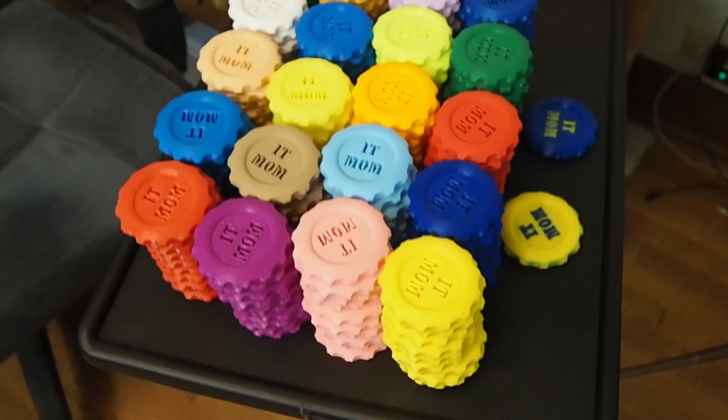So I did a live stream a little while ago and made a little announcement that I was going to take a break because I had some messes to clean up, and I had a bit of printing to do in preparation for MRRF 2018. That's right, I'm going to MRRF, and I've got 202 Maker Coins ready for it. Now let's talk about these real quick.

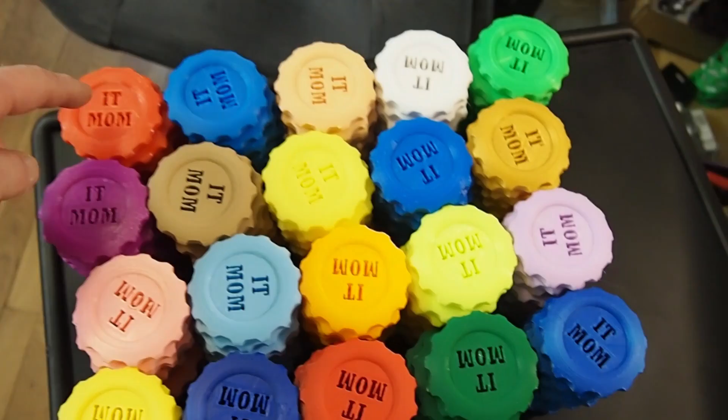Alright, so what do we got here? Well, we got a bunch of different brands, so let me just see if I can remember them all. Alright, so this is MG Chemicals Red PETG.

Very nice. This is the blue MG Chemicals PETG. This is light skin MG Chemicals. The whites are a combination of MG Chemicals and Zyltech. This is neon green from MG Chemicals. This is the gold roll of filament from Monoprice that came with my Mini.

This is MG Chemicals blue PLA. These are all PLA so far. This is MG Chemicals yellow, MG Chemicals wood, MG Chemicals purple, then MG Chemicals pink. Then this light blue, orange, fluorescent green, and purple are all Zyltech.

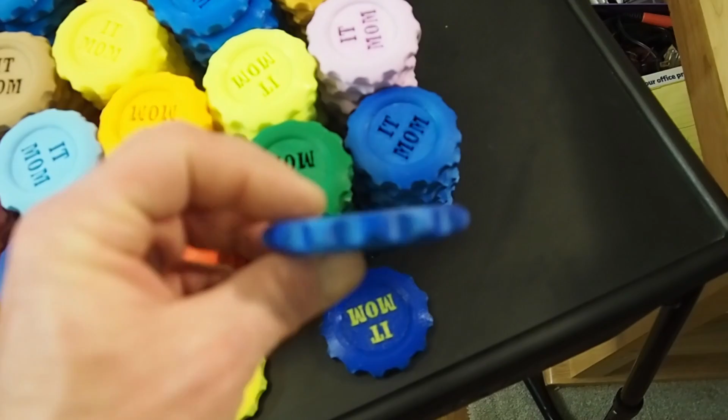And now let's come to the front of the line. These guys are important, and the reason is, oh, stay tuned. But this is Proto Pasta's High Five 3D printing nerd stuff. These two right here are Matter Hackers Pro PLA. And these two here are Tesla filament.

So these guys are actually something special. Little project I've got going on behind the scenes with my Delta, and I'm not ready to reveal it yet, but as you see I've got some dual extrusion going on. I was able to get these two printed, and then I had some failures and other issues, and then time restraints and stuff.

But what I'm going to be doing is putting these all in a bag, and if you see me at MRRF, you get to draw one, blind, and get a free Maker's Coin. There's nothing to it, and if you get one of these two special coins, you win one of two prizes.

What are those prizes? Well, I reached out to two of my favorite companies, and both of them said, hey, we'll throw you 2 rolls of PLA. What do you think? So one prize is 2 rolls of Tesla filament PLA of your color choice, shipped anywhere in the world. And the other is 2 rolls of Matter Hackers Pro PLA, in any color you want as well.

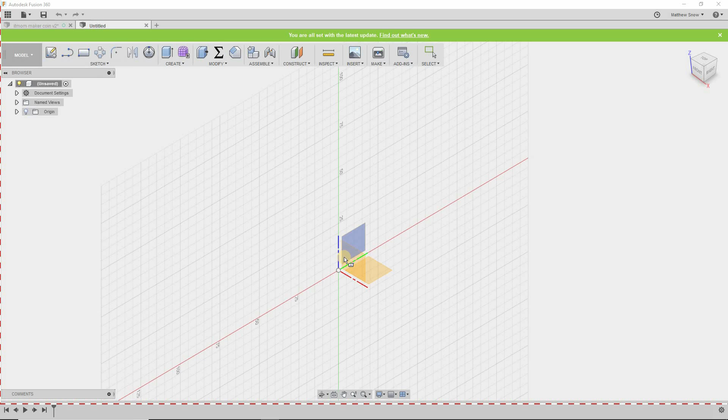you start with a two-dimensional drawing. So this first column is everything to do with 2D. So you're going to create a sketch. Let's say we want to create a rectangle. And where do we want to create it? Well, let's say we're going to create it right here. We're just going to create a rectangle. Boom, I've got a two-dimensional object.

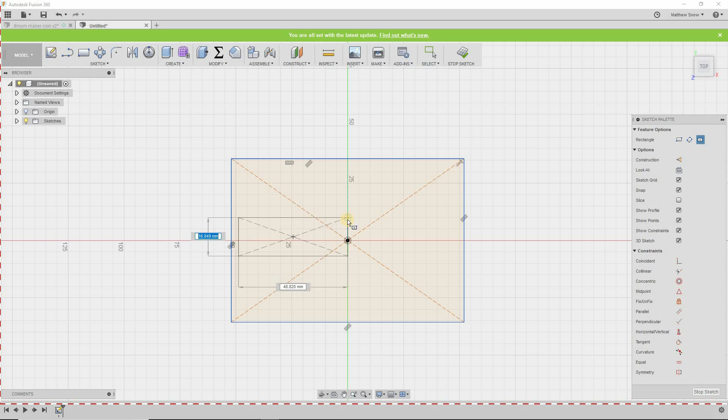Now the next column is Create, and that's where I'm going to take my 2-dimensional object and make it 3-dimensional by doing something. Also, let's stop the sketch first. Also, if you click on it, highlight it, and right click on it, these first couple of things will give you suggestions as to what you can do with what you have. So let's extrude.

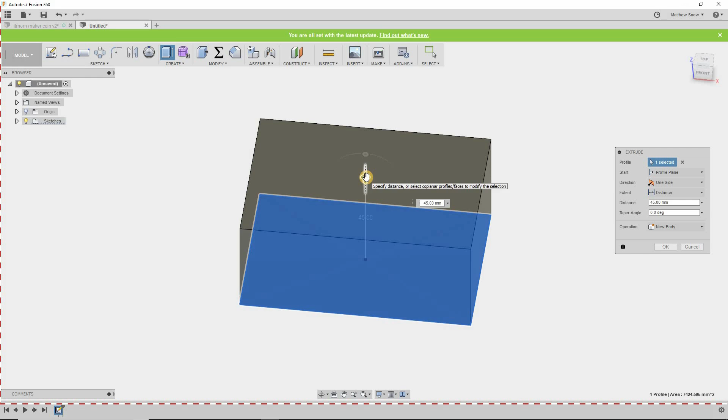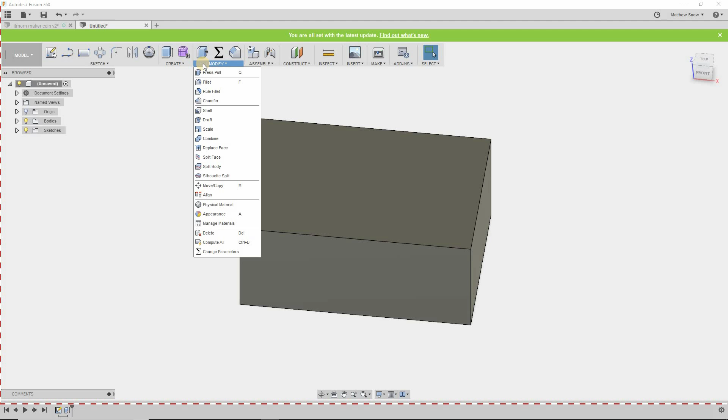So let's just take it up a little bit because I want to show you one other thing. So now we have a three-dimensional object. We went from a two-dimensional to a three-dimensional. Now this next column is everything that you can do once you have something in 3 dimensions. So what I want to do is shell it. And I'm going to shell that.

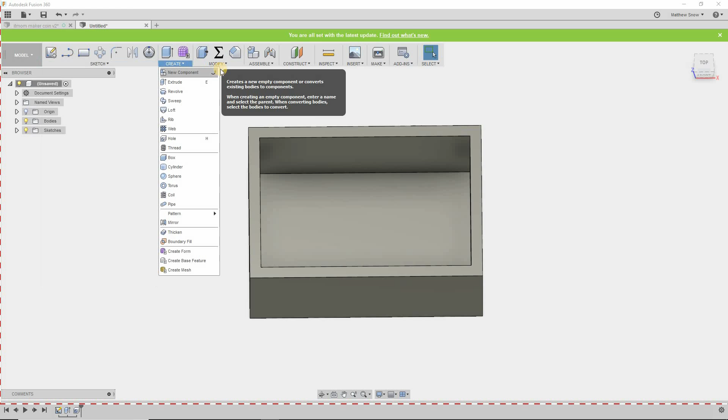And we're going to go to 5. So I've shelled it. I've taken a two-dimensional rectangle and made it three-dimensional by extruding it, then modified it by shelling it. That's kind of how you go. Now you can create sketches on other planes or surfaces and start the whole process again. I create a sketch, and then I'm going to do something with that sketch, whether I'm going to take away or add something.

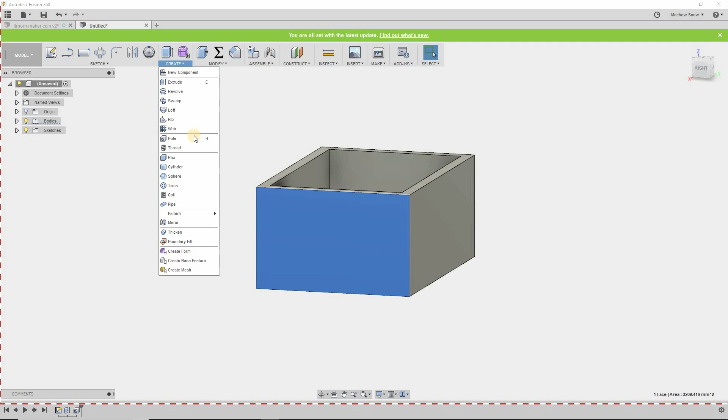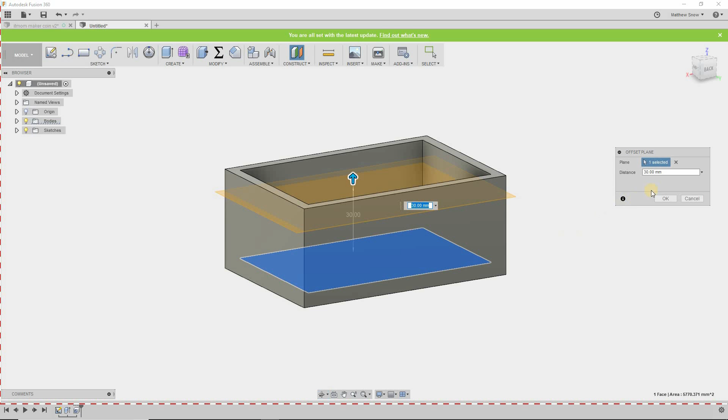So let's do this. Let's create a new offset plane. I've selected that, and if I right click on it, it'll give me a list of suggested things I can do. Look there, I want an offset plane. I'm going to take that offset plane and move it about, not quite all the way up. Alright, now I have a new surface to create a 2-dimensional drawing.

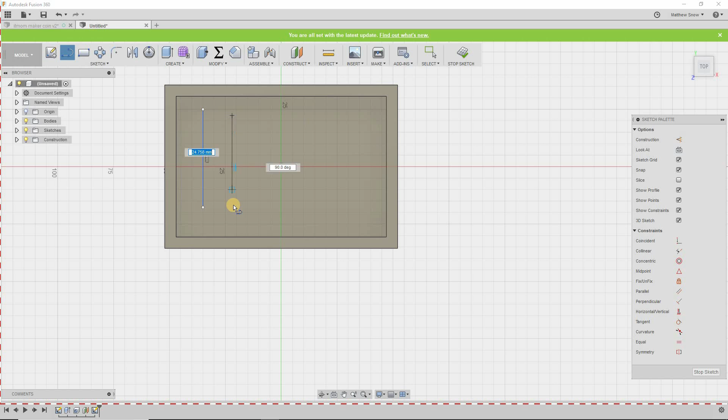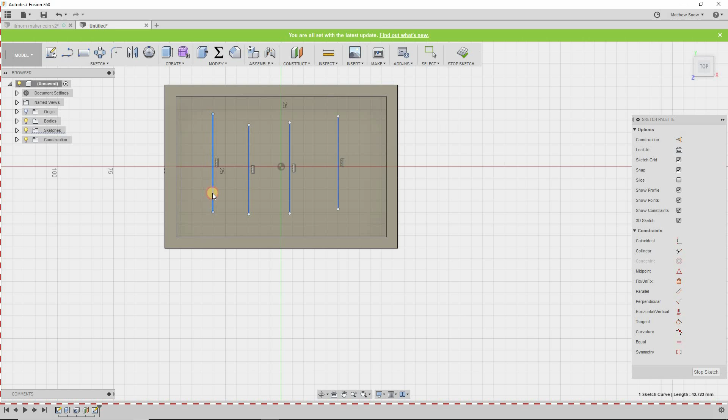So let's create a line on that plane. I'm not doing this in any specific order, just drawing some lines. Let's move that one here. There's no constraints on these yet, and I'm not going to put any on because I'm just going to demonstrate this one little thing that I didn't know until I learned it in this lesson. So I'm going to draw a couple of these lines. Now we have 2-dimension. I have these lines. Well, what am I going to do with those lines?

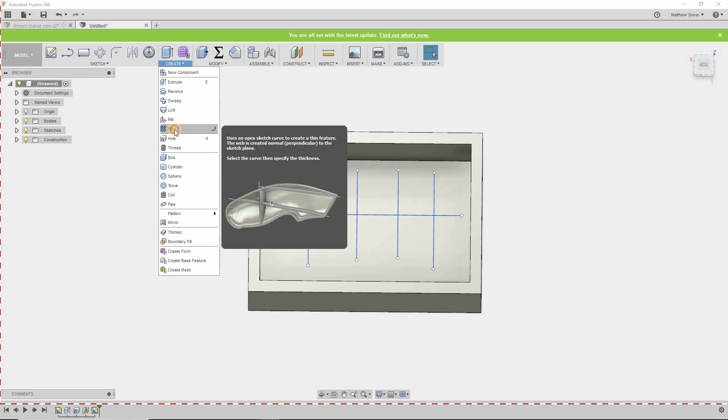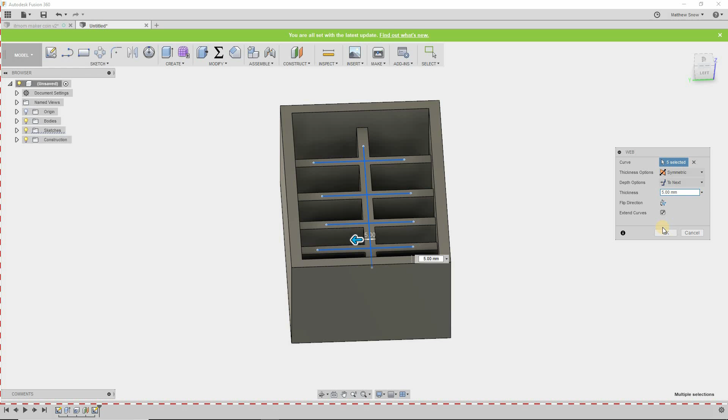Well, I'm going to create a web. What's a web? Let's see. I'm going to click on all my lines that I just made, and then I'm going to draw it out. Look at that, I've created webs. Let's make it a little bit smaller. Let's see what 3 looks like. And if I unclick the extend curves here, I just have the lines. If I extend it, it goes right to the outer shell. How cool is that? So all kinds of things can be created real easy just by using that little web feature.

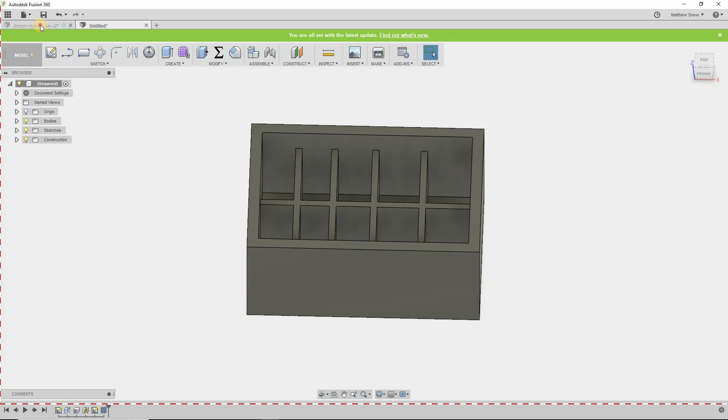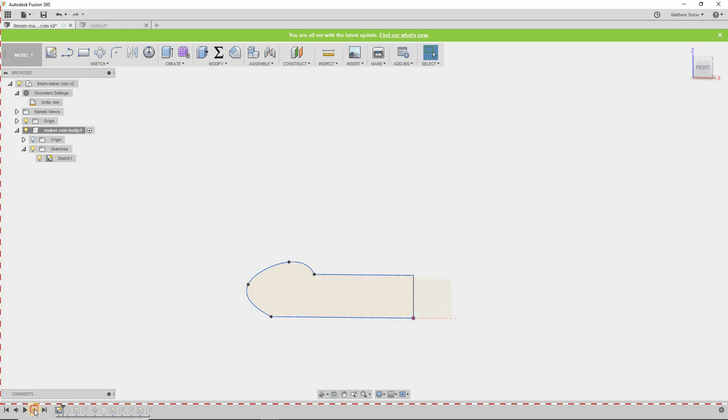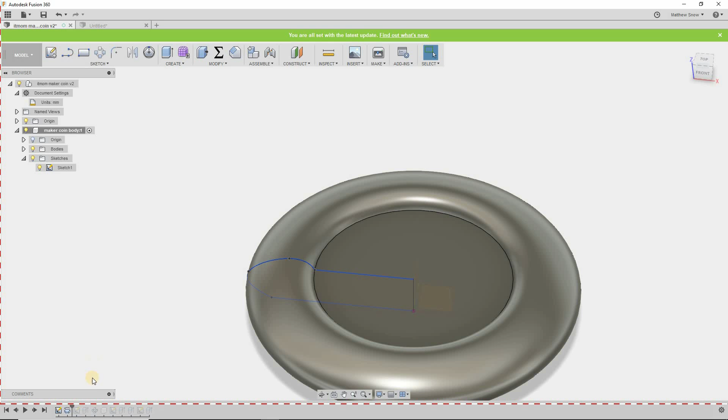And I have this little shape that I created, and then I created a revolve right around that. I used that surface to create a revolve right around that axis. Just like that. Next, I took and made another 2-dimensional drawing on a surface, and then I created an extrude

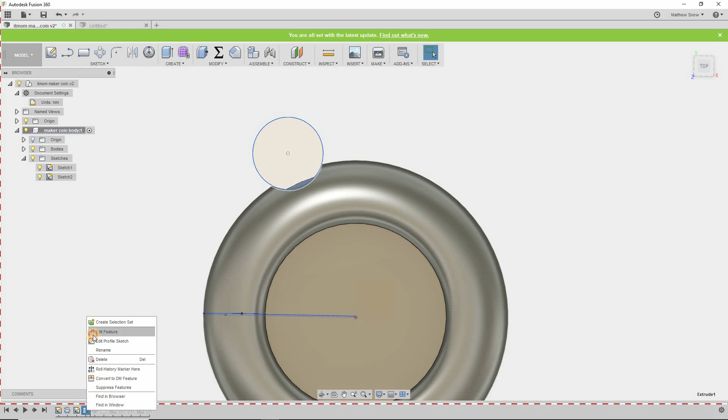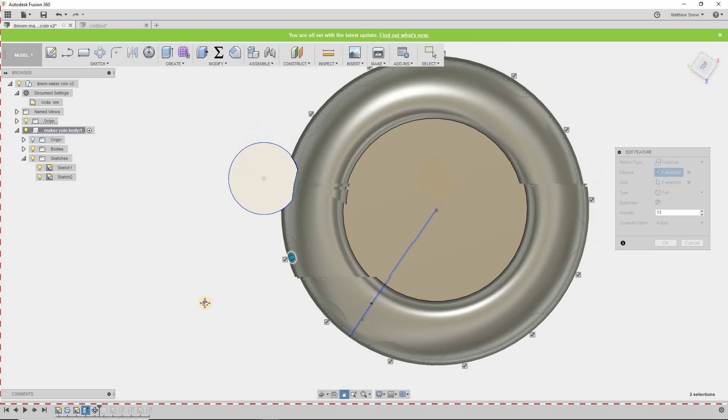from that, and then I patterned that. Let's go back. So I used this and I extruded. There we go, now we can see it. I kind of worked from the top down. And then I took and created a pattern with that feature. As you see, spread it around. Could have gone up a couple, but I didn't. I like that look.

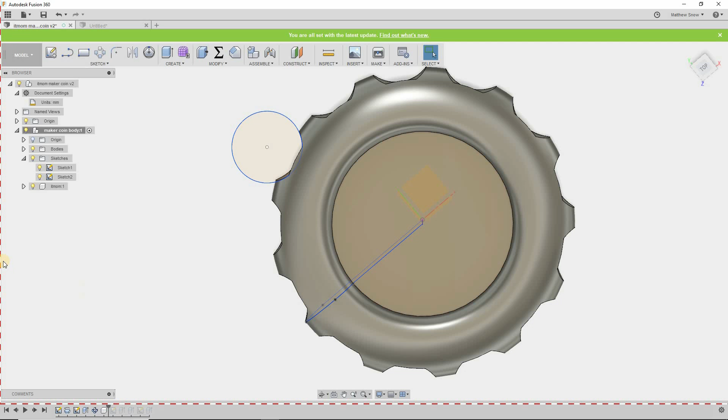And then I went and created a new component. The reason I made this new component is because this is where I made my dual extrusion file. I had 2 different files, and when I take them together, assign one to one extruder head and one to the other extruder, and you got a dual extruding model. So let's take a look. I created a new component.

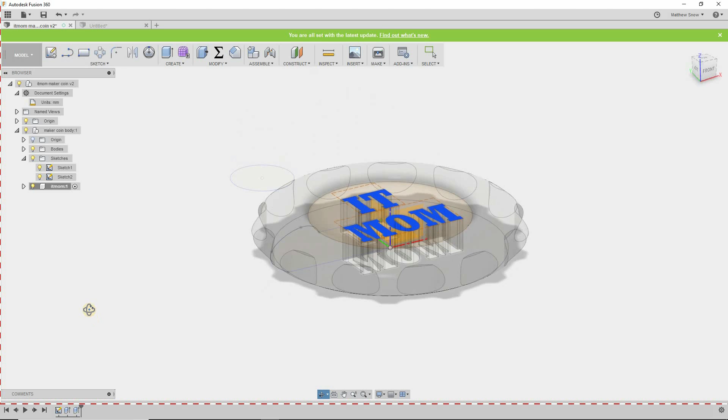Put some text, and then I extruded that text, and then of course in the regular model I projected that and cut it out so that I had just the main body. And there you have it.

My Inside the Mind of Matt Maker's Coin. So I hope this inspires you to go out and make a Maker's Coin of your own.